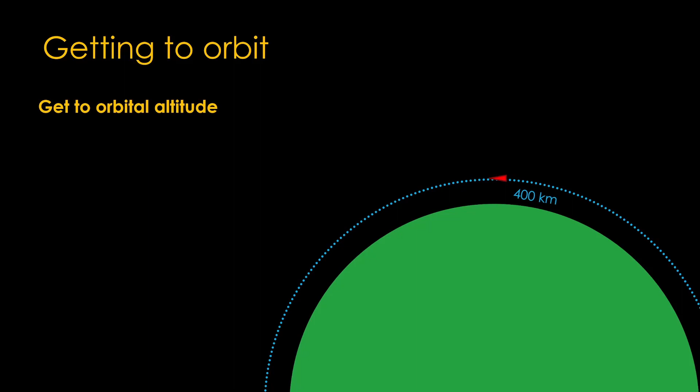And after that bit of fun from 1902, we can move on to the main topic. Let's say we want to send cargo to the International Space Station. We first need to get to 400 kilometers. Then we need to go sideways fast enough to stay in orbit, which at 400 kilometers is 7,672 meters per second.

The majority of the energy used to get into orbit goes to getting up to orbital speed, roughly 90% for this orbit. We generally talk about this in terms of delta V, which is how much acceleration potential we need. It's about 9,000 meters per second total.

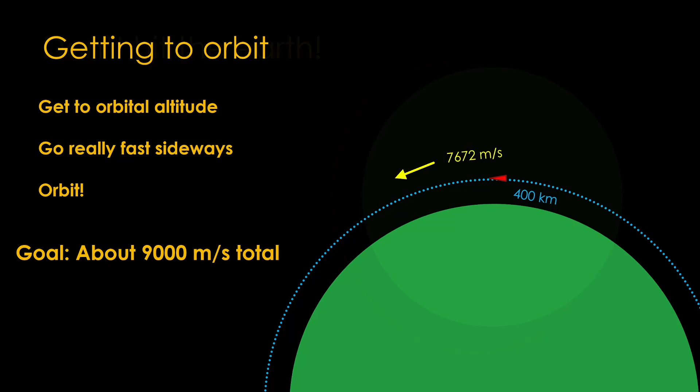We also need to make sure we don't hit the Earth. If we launch on a ballistic trajectory from the Earth, that trajectory will run back into the surface of the Earth. We will fix that by doing a circularization burn, typically done at the high point, or apogee, of the trajectory.

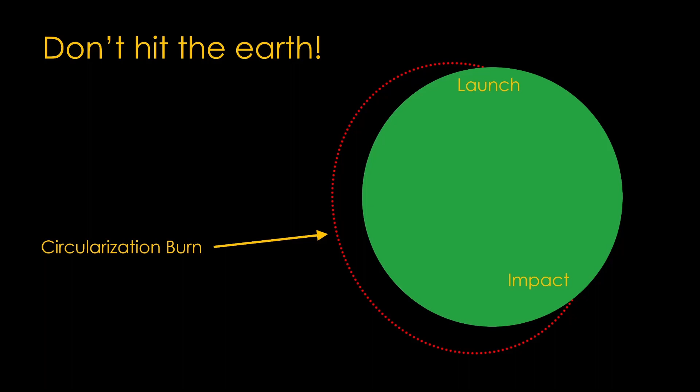We'll start by looking at conventional guns. Why can't we just build a big gun? Well, there's some problems with that approach. Here are some numbers from a 155 millimeter, or about 6-inch, artillery gun. When the gun fires, the projectile is obviously just sitting there.

The propellant converts itself to gas and creates a lot of pressure inside the gun, and that accelerates the projectile very quickly, at up to 100,000 meters per second squared. But perhaps 1/100th of a second later, the projectile has moved 3 meters and is traveling at about 600 meters per second. The gas has expanded a lot, and therefore the pressure has dropped way down. That means the force accelerating the projectile is much lower.

Step forward again, and the projectile has reached the end of the gun, traveling at 820 meters per second. Can we build a better gun? We can use a longer barrel, which gives more time to accelerate the projectile. Or we can use more propellant. Naval guns in World War II were tunable based on how much propellant was used.

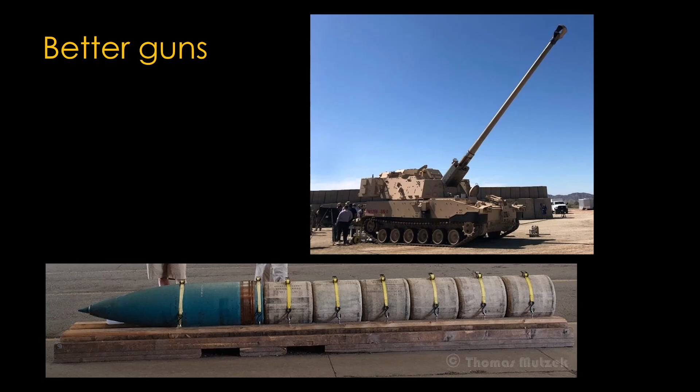This picture shows the projectile and powder bags from a 16-inch naval gun, which fired a projectile that weighed about 1,000 kilograms. But that still only gets about 850 meters per second. In the 1960s, there was a project known as HARP, for High Altitude Research Project. The goal was to see if it was possible or practical to use guns for orbital launch.

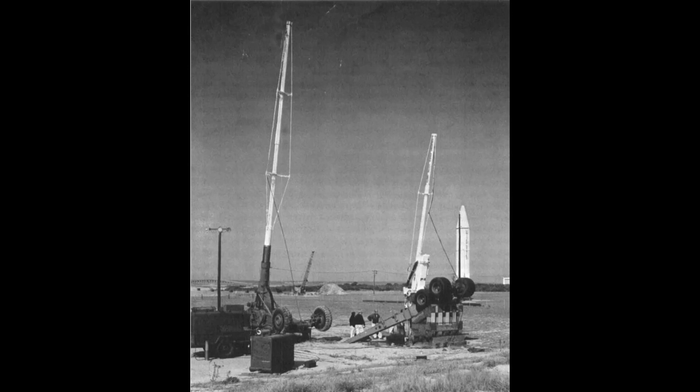HARP started with a 5-inch gun, shown on the right here, and moved on to 7-inch guns. Both guns had significantly extended barrels to produce the maximum velocity. This approach requires supporting cables on the outside of the barrels to keep them from bending too much. After initial tests with these guns, HARP upsized.

The U.S. Army obtained surplus battleship gun barrels from the Navy for the project. They were 16-inch or 406mm barrels, which HARP bored out to 16.3 inches or 414mm to convert them to smooth bores. Then, following their usual approach, they stacked 2 barrels end to end and added a supporting structure, ending up with a gun with a 116-foot or 35-meter barrel.

One of the problems with firing projectiles for altitude is that a big 16-inch shell has a lot of drag and therefore slows down quickly. This problem has already been solved. A thin and very dense projectile is wrapped in a shell that detaches early in flight, leaving a low-drag projectile traveling very fast.

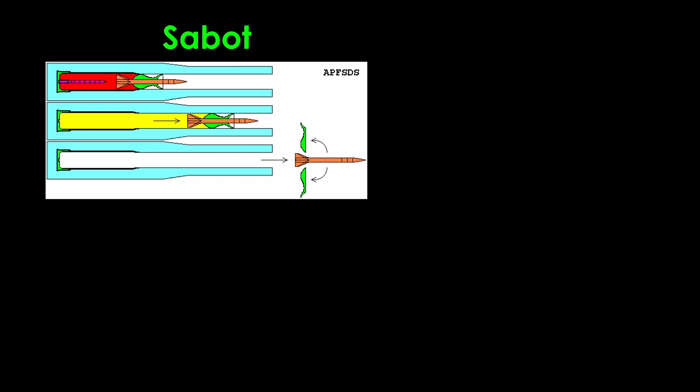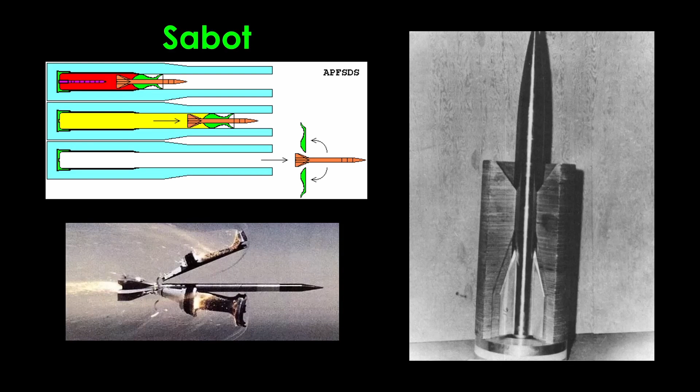The popular name for this comes from the French word for hoof or shoe, which is pronounced sabot if you are French or British, sabot if you are American. Here's a picture of the sabot falling off a projectile after it has been fired. The designs for HARP were quite simple. There was a metal pusher disc at the back and a plywood sabot around the projectile.

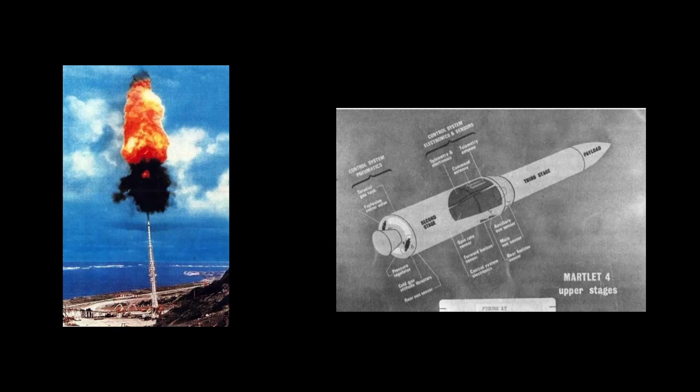There were projectile designs for the 16-inch gun to launch a rocket that would have a payload of 50 to 200 kilograms, but the project was canceled before they were flown.

What if we could use electricity to get to orbit? I did a video on spin launch, a non-gun electric launcher, a while back. The link to the video is in the upper corner.

The first approach is known as a railgun. Railguns are much loved in science fiction. This is a weapon from the Halo universe. They are very simple. You take 2 metal rails that are spaced a fixed distance apart. Between the rails, you put a metal part known as an armature that bridges between the 2 rails so that current can flow between them. It's typically made of aluminum for lightness.

Hook up a nice DC power source like a car battery, and the resulting magnetic field will cause the armature to be accelerated down the rails. Simple and clean. Assuming the car battery I show here can put out 12 volts at 1000 amps, and the system runs at 25% efficiency, we can do some calculations. If the rails are 6 meters long, and the armature plus payload is 1 kilogram, we can expect the final velocity to be about 38 meters per second, 85 miles per hour, or 137 kilometers per hour. Not really very impressive. At 38 meters per second, the projectile won't travel very far.

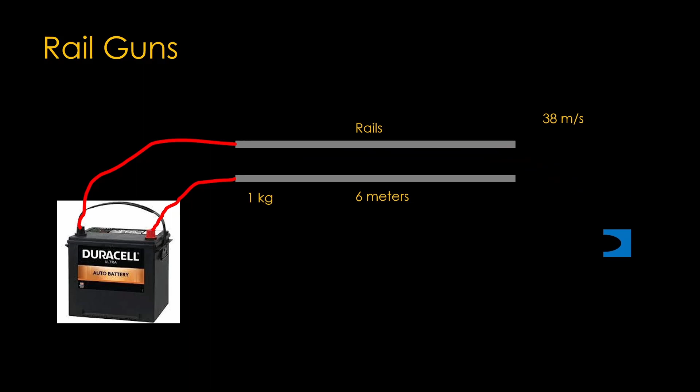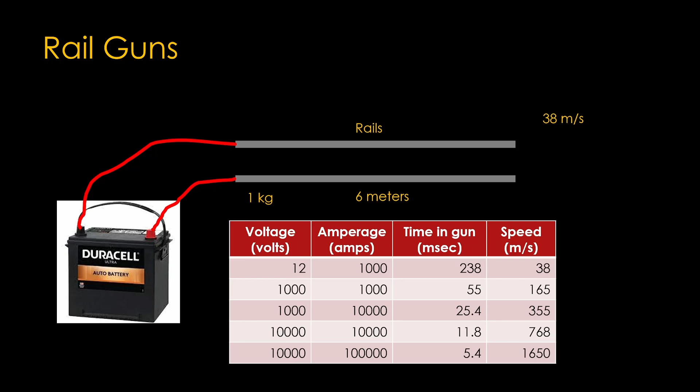We can push higher voltages or more current to accelerate faster, but the benefits aren't that great because as you move faster, you spend less time in the gun accelerating. If you push up to 10,000 volts and 100,000 amperes, you can get a speed of about 1,650 meters per second for that 1 kilogram payload. Not really very exciting. An M1A1 tank can fire a 7 kilogram projectile at that same 1,650 meters per second.

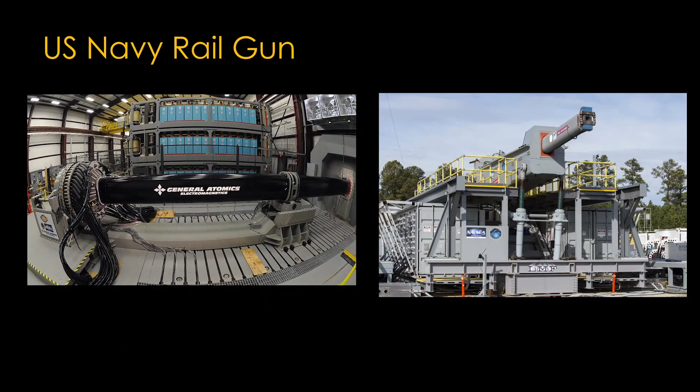The U.S. Navy did research to replace existing small guns on destroyers with railguns. This is a research prototype. As you can see, there are huge cables to carry the necessary power. Here are 2 more refined prototypes. In the background of the left picture is the huge capacitor energy storage bank to provide the amount of energy required. This video shows a number of different views of a test firing of one of the prototypes.

The Navy spent $500 million on research and managed to fire a 25-kilogram projectile at 2,500 meters per second. But the rail wear problem was deemed to be too hard to solve, along with the requirement that the ship needed 25 megawatts of power. This program was canceled in 2021.

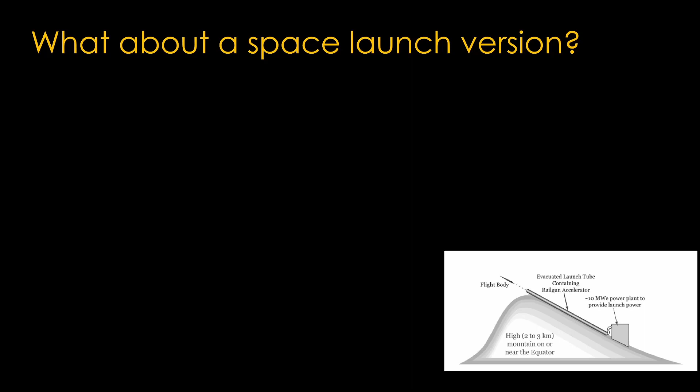There have been space launch versions proposed. If you could build a 5-kilometer launcher, provide it with 10 gigawatts of launch power, you could accelerate a 100-kilogram launch mass to 7,211 meters per second. Theoretically, of course. You then need to use the onboard rocket to circularize the orbit, and that means you are down to less than 50 kilograms of payload. There was no discussion of rail wear.

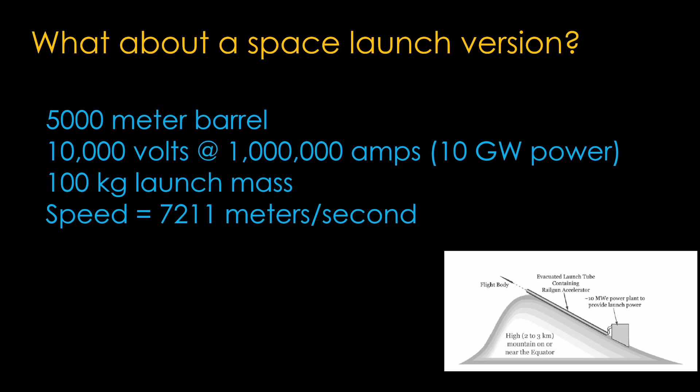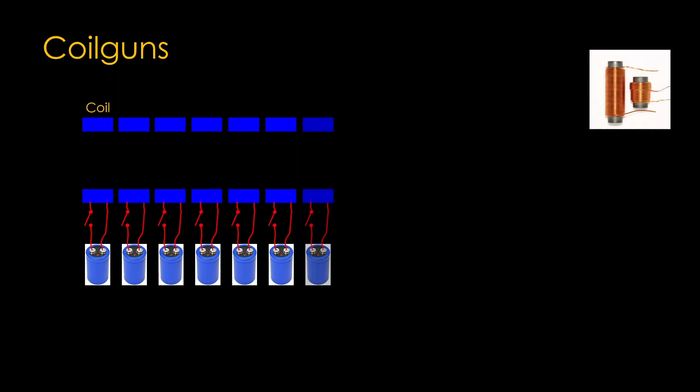The next electric option is a coil gun, also known as a Gauss gun. You take a coil of wire wound around some sort of hollow form, you add a big capacitor or some other way to store a lot of power, and then a switch to connect the capacitor to the coil. You build a series of these, and the inside of the coils becomes your launch tube. Inside the launch tube, you put your projectile, and then you fire the coils in sequence. Each coil provides a little bit of acceleration, and the projectile keeps speeding up as it goes down the tube. If you need more acceleration, you just add more coils.

One of the challenging parts of the coil gun is to make sure the coils fire at the right time. To do this, you need an accurate way to determine where the projectile is and how fast it is going. You can do this with a laser rangefinder at the launch end. It will fire a laser pulse that will reflect off the back of the projectile. When the projectile moves farther away, the pulse will take longer to return.

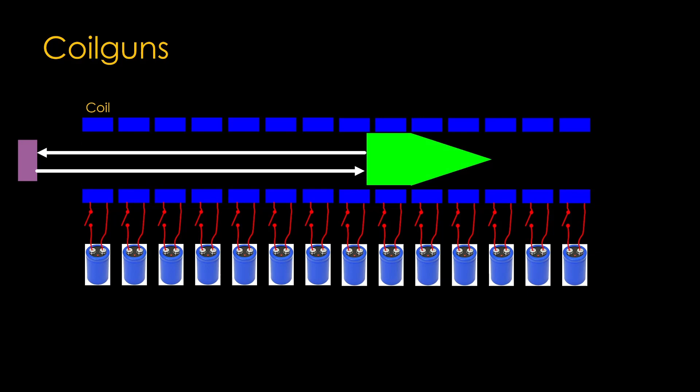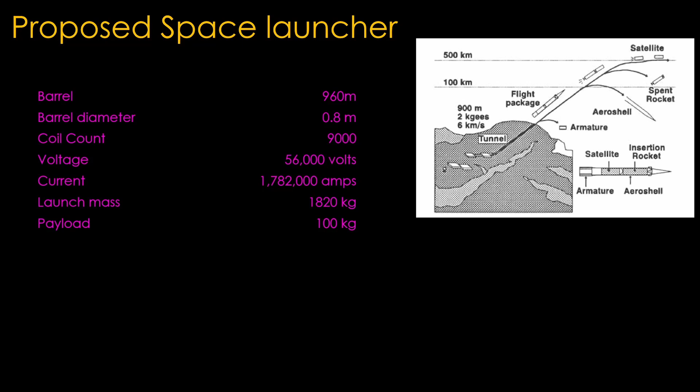Here's a proposed space launcher using a coil gun. You build a 0.8 meter barrel that is 960 meters long inside of a mountain, using 9,000 individual coils. Each coil will have a power supply that can supply 1.7 million amps of power at 56,000 volts. That will give you 6,000 meters per second with an 1,820 kilogram vehicle, and ultimately a payload of 100 kilograms to a 500 kilometer orbit.

The projectile is shown in this diagram. Most of the mass goes to the armature and the solid rocket motor that will be used to place the payload in a circular orbit. The heavy rocket motor is placed backwards in front of the payload so that the projectile will remain stable. And all of this is encased in an aeroshell to protect the rocket and payload from the high heat of launch.

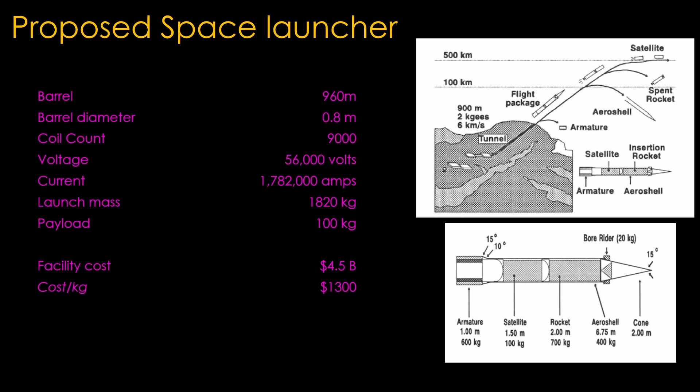This proposal is nicely done and quite complete. Their estimate is that the facility cost will be $4.5 billion and yield a cost per kilogram of $1,300, which frankly isn't very exciting. The cost is dominated by the cost of the power supplies, and if that could be reduced, this is clearly a viable approach. I'll note here that the launch cost numbers are highly suspect. There are just too many variables for it to be anything other than a guess. That will be true for all of these approaches.

The next approach is to use a gas gun. Specifically, a light gas gun. We start with a conventional gun design. At the back of the barrel we have the propellant, and in front of that we have a piston instead of a projectile. It's typically made of a dense plastic. Then we add a second barrel, or stage, with a small projectile in it, connecting the two with a tapered block. In front of the projectile barrel we put what is known as a burst disc. This is a piece of metal that is scored so it will break when a pressure is exceeded. This allows a high pressure to be developed in the barrel before the gas starts acting on the projectile.

And finally, we have the gas. It's called a gas gun because we are using gas compressed by the piston to accelerate the projectile. It turns out that one of the limitations in the speed of guns is the speed of sound of the gases in the barrel, and that depends on the molecular weight of the gas. You want a light gas with a low molecular weight, and that's why it's called a light gas gun. Helium is safer and is used in some research settings, but it's lower performing, much more expensive, and a finite resource, so hydrogen is a better choice.

In operation, we fill the space in front of the piston with hydrogen pressurized at a few times atmospheric pressure. We then ignite the propellant, which drives the piston forward quickly and pressurizes the space in front of the piston, but this pressure is still restrained by the burst disc. When the pressure gets high enough, the disc bursts, letting the very high pressure hydrogen in behind the projectile, and it exits the gun at high speed. The first stage creates the high pressure gas, and the second stage launches the projectile, so it's a two-stage light gas gun.

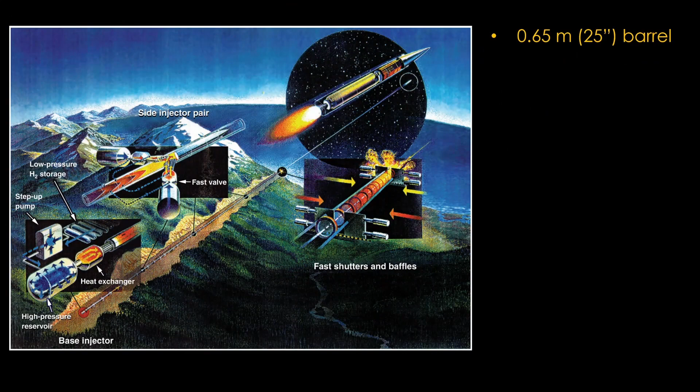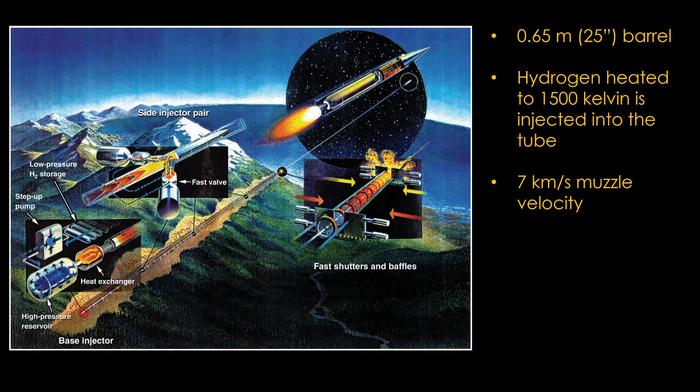Here's a real proposal for a launch system. It has a 25-inch, or 0.65 meter barrel. It uses hydrogen heated to 1500 Kelvin injected into the tube, and it can launch a 680 kilogram projectile at 7 kilometers per second. It uses a multi-injector approach. There is a single base injector at the starting point, and then 15 pairs of injectors along the barrel to add more gas to keep the pressure and therefore the acceleration high.

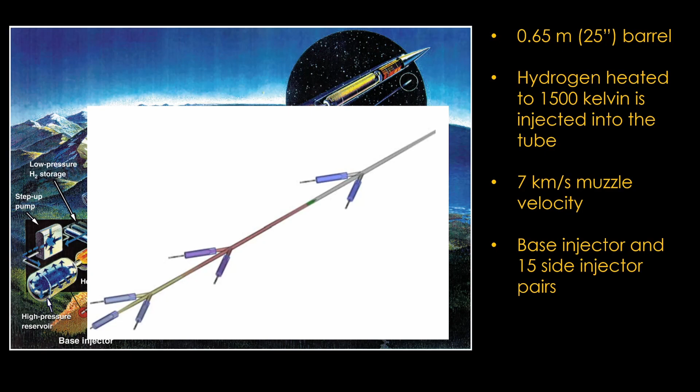Here's a series of steps. Number 1, minus 1 hour: prepare the pressure injectors and pump all of the air out of the launch tube. Number 2: launch. Number 3, 0.435 seconds: discard the sabot. Number 4, 300 seconds: jettison the heat shield and reorient the projectile so the rocket motor is pointed in the correct direction. 5, 545 seconds: fire the solid rocket motor. 6, 636 seconds: in orbit with 165 kilograms of payload. Then, number 7: spend 2 hours pumping the hydrogen out of the tube and storing it for reuse. Here's the projectile.

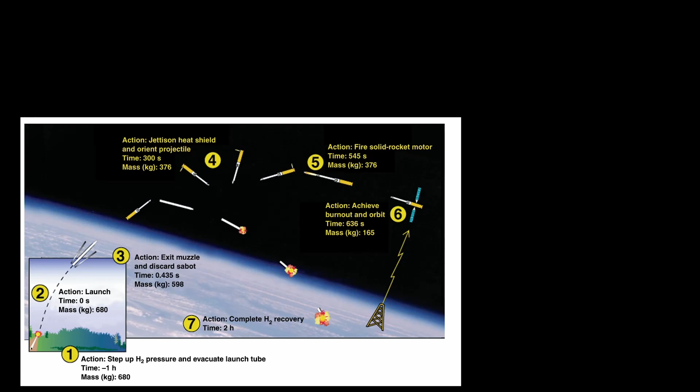Green Launch is working to build a light gas gun launch solution. Their Phase 1 solution is targeted at launching a small payload of unspecified mass at 2,000 meters per second and 100 kilometers in altitude. That is pretty similar to what Project HARP did. Phase 2 is to reach 200 kilometers in altitude, launching at 3,000 meters per second. Phase 3 is to launch at 6,000 meters per second to 100 kilometers with a real payload and put a 1-pound CubeSat into a 300 kilometer orbit.

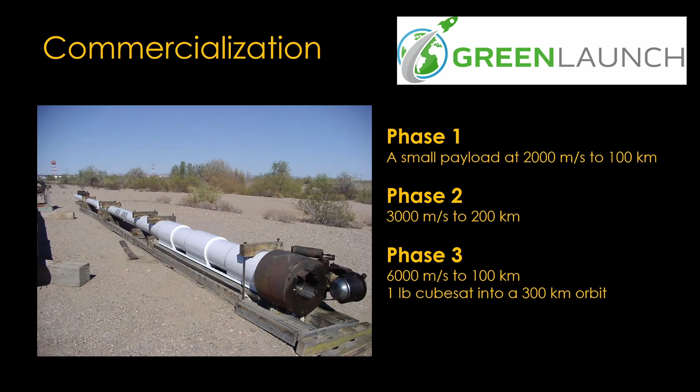I couldn't find any details on what size or length their launch tubes will be, but it's a fair guess that they will require multiple injection stations to get 6 kilometers per second. Their assertion is that a facility that costs $200 million can launch 91 kilogram payloads, and that if they do 7,000 launches per year, the cost will be about $240 per kilogram. For comparison, that's about 40 Falcon 9 Starlink launches, so it's not a totally ridiculous amount to launch, but it is pretty optimistic in terms of business. I do think gas guns are reasonably practical.

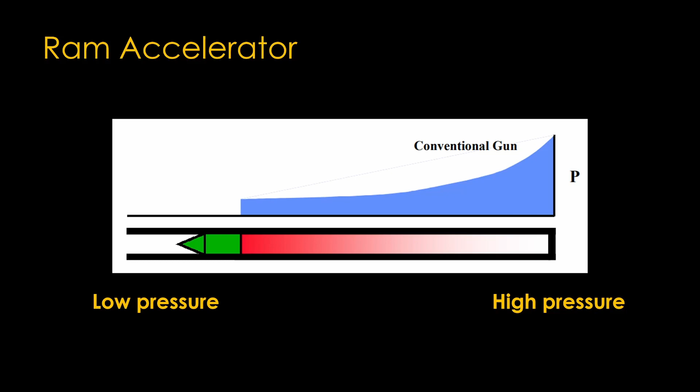We finally get to the last approach, the ram accelerator. It's not strictly a gun, at least not like the ones we've talked about, but it does have a projectile and a barrel, so I'm calling it a gun. One of the problems with conventional guns and gas guns is the reduction in pressure as the projectile moves away from its starting point. The ram accelerator is an attempt to fix that limitation. It's similar to a ramjet engine. The diffuser in front of the engine is shaped to take incoming airflow and compress it so it can be mixed with fuel and burned to generate thrust.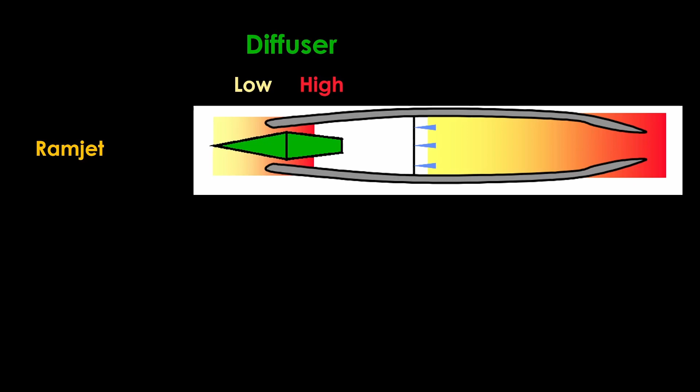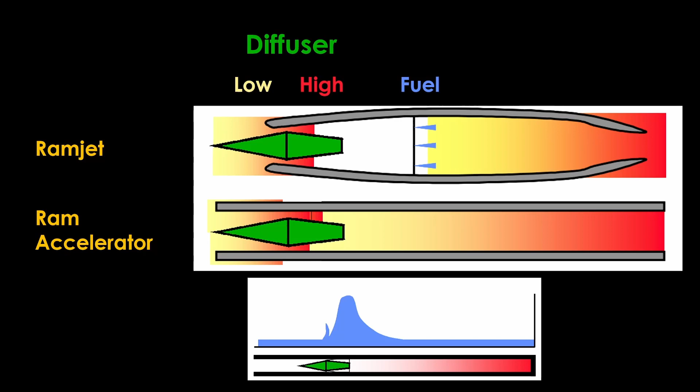A ram accelerator uses a projectile that is shaped like a ramjet diffuser. The walls of the launch tube serve the same function as the walls of the ramjet. They help compress the contents of the tube and heat it up. The tube is filled with a flammable mixture of fuel, methane or hydrogen, and oxygen, and that high pressure makes it hot enough so that it burns and generates thrust behind the projectile, pushing it forward. There is effectively a traveling wave of pressure due to the combustion right behind the projectile, consistently pushing it forward.

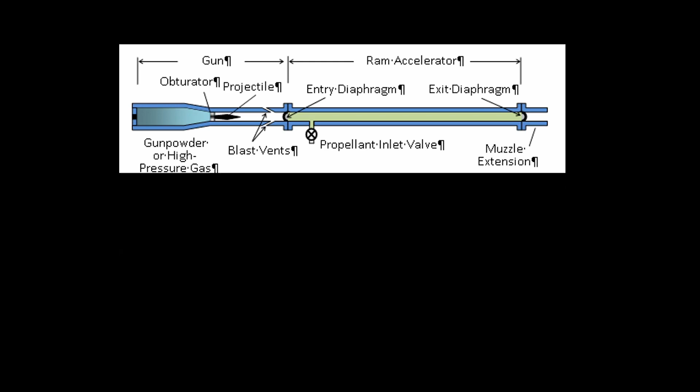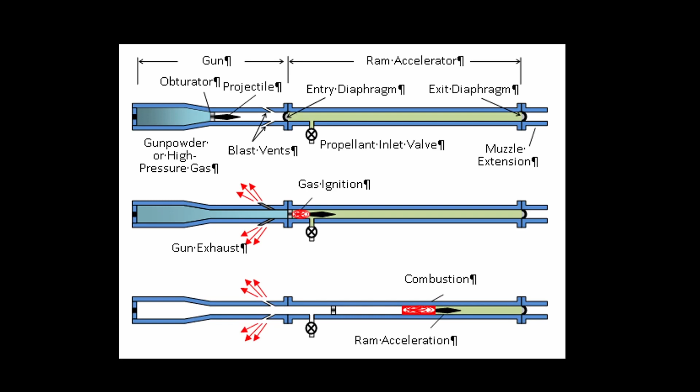Here's how it works, and I apologize for the paragraph marks on the image. A projectile is first accelerated with a conventional gun, fueled by solid or gas propellant. The ram accelerator is filled with an appropriate gas mixture, and there are diaphragms across the entry and exit to keep the gas confined. The projectile then enters the ram accelerator. Like a ramjet, it needs enough starting velocity for the gas to ignite. It then flies down the accelerator with combustion pushing it from behind.

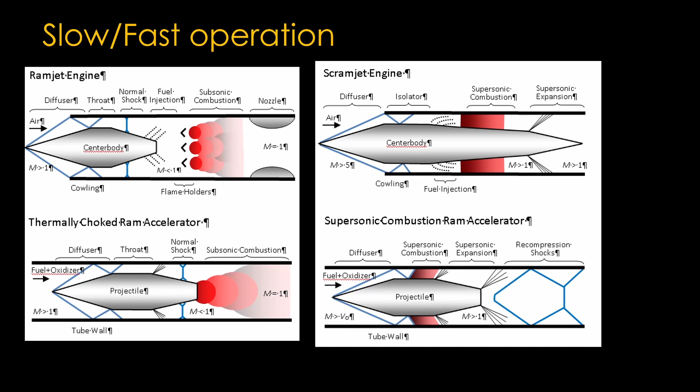Ramjets are limited to about Mach 6 because the shock waves in the inlet reduce pressure and thrust. There's a variant of the ramjet known as the scramjet, or supersonic combustion ramjet, which moves the combustion earlier and allows higher speeds. The same approach can be applied to the ram accelerator. At lower speeds, there is combustion behind the projectile, and at higher speeds it moves up to the side of the projectile. Getting this to work will obviously require careful design.

The ram accelerator has one significant advantage. A ramjet or scramjet is limited based on the speed of sound in whatever air it is in. That's about 330 meters per second at ground level, but only 300 meters per second at 10,000 meters. The ram accelerator can use fuel mixtures that are tuned to change the speed of sound in different sections of the launch tube. The beginning has a lower speed of sound when the projectile is going slowly, and the later sections have a higher speed of sound.

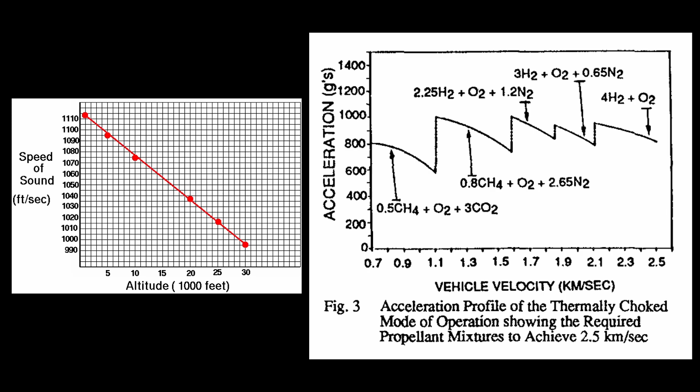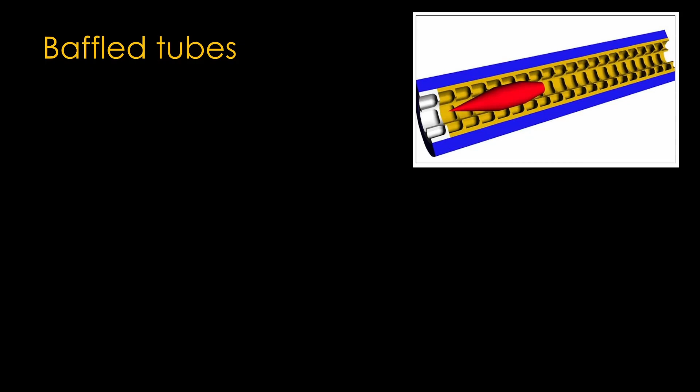One of the problems with the ram accelerator is that the pressure wave quickly dissipates behind the projectile and reduces thrust. Newer designs use baffled tubes. The baffle contains the combusting gases until the projectile passes, and the combustion then propels the projectile from behind.

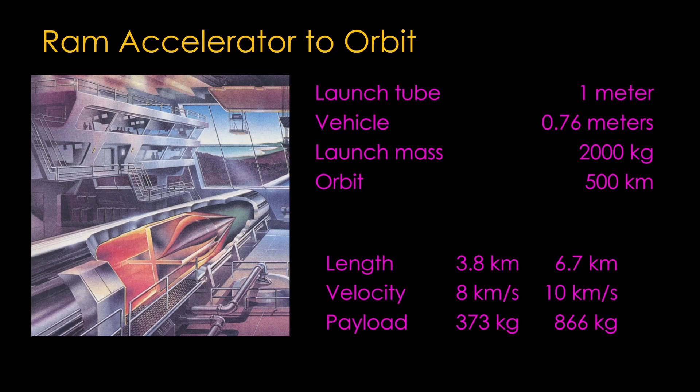They present two options. The economy option uses a 3.8-kilometer launch tube that gives 8 kilometers per second of velocity and 373 kilograms of payload. The full meal deal option uses a 6.7-kilometer launch tube that gives 10 kilometers per second and nets 866 kilograms of payload. That all sounds great.

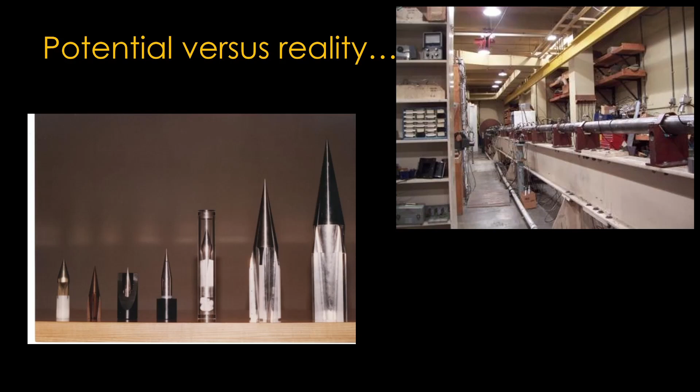But here's a dose of reality. The majority of the research has been done at the University of Washington on a small research setup with a 16-meter tube, trying many different variables including different gas mixtures, different projectile designs, different tube designs, etc. Top speed tested is about 2,300 meters per second, which is a long way from 8,000 meters per second, but it's pretty clear that it actually does work.

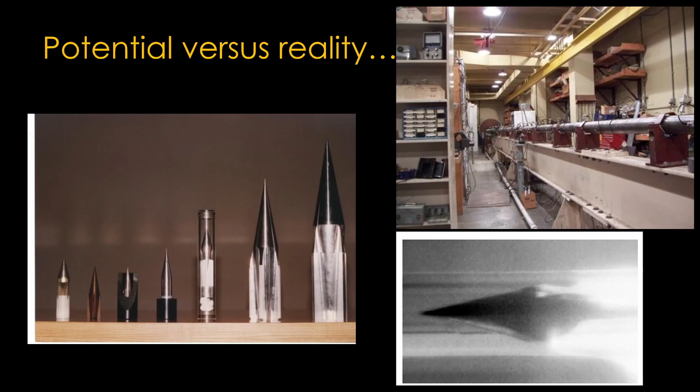Here's a picture of a projectile in a clear tube, and you can clearly see the combustion behind it as it flies to the left. Time to evaluate the options. Conventional guns are simple and well understood, but they top out at about 2 kilometers per second. That's just not enough velocity to make it worthwhile, so there's no practical solution here. I'm going to give it a D on practicality.

Railguns are simple in design, and the gun part is relatively cheap. Unfortunately, there's no way around the problems of the armature-to-rail contact. The friction is going to wear down the rails over time. You might get away with that with a 16-meter gun barrel. It's just not going to work with a 5,000-meter space launcher. It also has high electrical requirements. It also gets a D. It's great at making big, pretty pictures, but I don't see how you can make something real out of it.

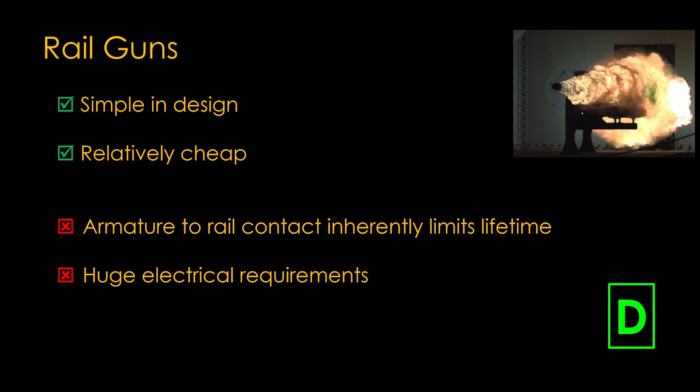Coil guns have a lot going for them. The coils and power supplies can be modular, and that could bring down the price a lot in theory, and they should last well as they are low contact, and they should be able to get high velocities. On the downside, those high-power coil modules are always going to be expensive, and they need a lot of power. I think you can build ones that work, so I give it a C, but the construction costs look to be pretty high, and if you mess up a barrel, it's going to be very hard to fix.

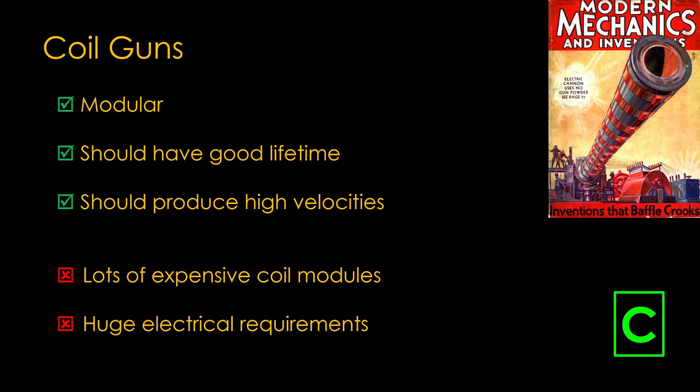Light gas guns have a long research history and are very well understood, and they're pretty simple. They don't require large amounts of electricity. The research versions reach high velocities with tiny projectiles, usually measured in grams. They would need to be scaled up a lot to do orbital launch, probably with multiple injection. I think you can probably build one that works, but it's not going to be simple the way the research ones are. I'll give it a B grade. You can get a decent velocity out of it, and it's not too complicated, except that you need the multiple injection approach to get the speeds you really want.

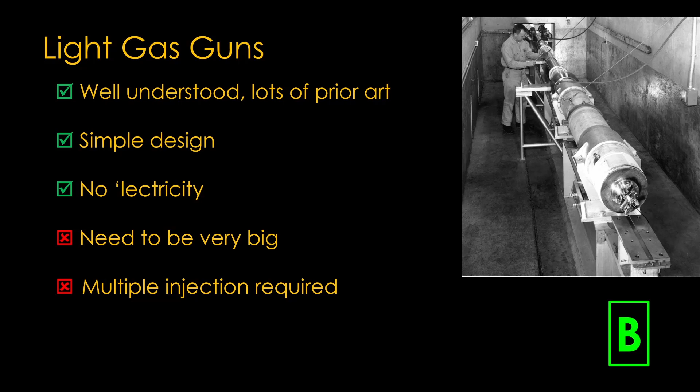RAM accelerators have generated a lot of research interest. They are simple conceptually. They use a chemical fuel, which is a great way to generate the required energy, and they look like they are tunable with different fuel mixes. The big downside is that nobody has built big and high velocity versions. I'm going to give it a B. It's the most promising approach I've seen, but lack of research is concerning.

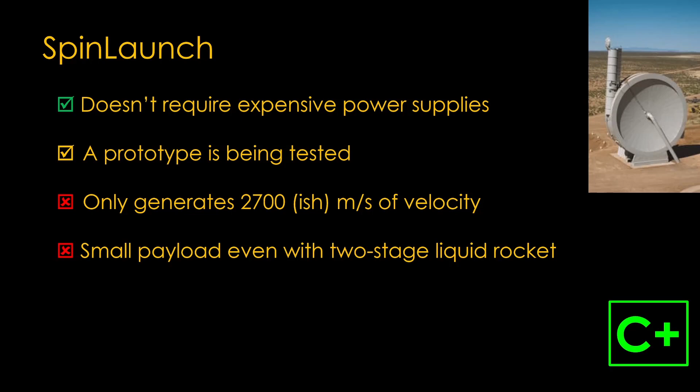I talked a lot about SpinLaunch in the other video. It's nice that it only requires small amounts of power over the long spin-up time rather than a bunch really quickly, and they get props for having real hardware. But they haven't been very open about the velocities they really expect, and they are talking about a tiny payload for a fairly big vehicle and a 2-stage rocket. They'll get a C, with a plus added because they have real hardware and it looks like they have decent funding.